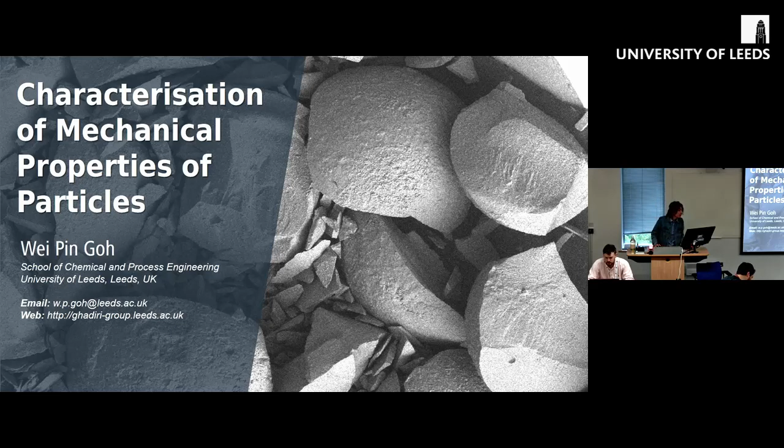Hello everyone. I'm Wei Pin, and today I'm going to talk about the characterizations of mechanical properties of particles.

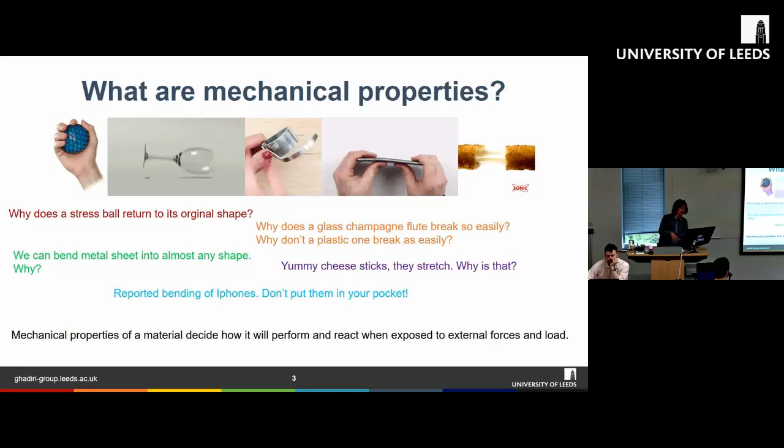So basically, all of these behaviors of materials are actually manifestations of mechanical properties. Essentially, the mechanical properties of a material will decide how materials perform and behave when they are exposed to external forces.

So the scope of my talk today: particularly, we're going to talk about the mechanical properties in the context of particle breakage.

Particle breakage can be desirable or undesirable, and particle breakage actually happens across different industries. For desirable breakage, we're talking about something like milling—we want to mill something into smaller particles. For example, with flour, you want to grind the grains small enough so that you can use it as flour.

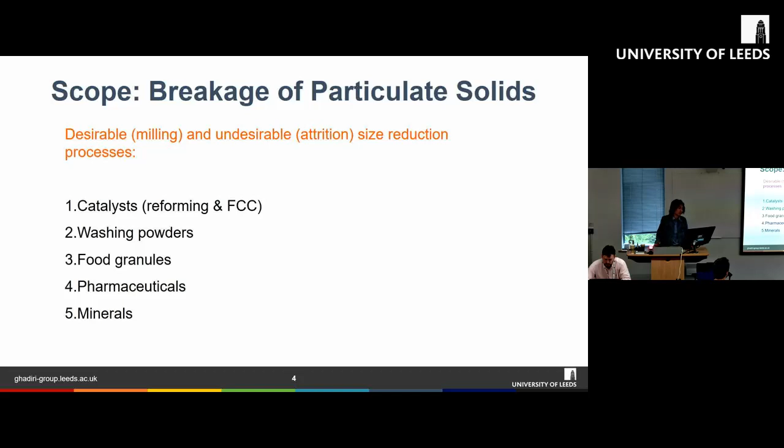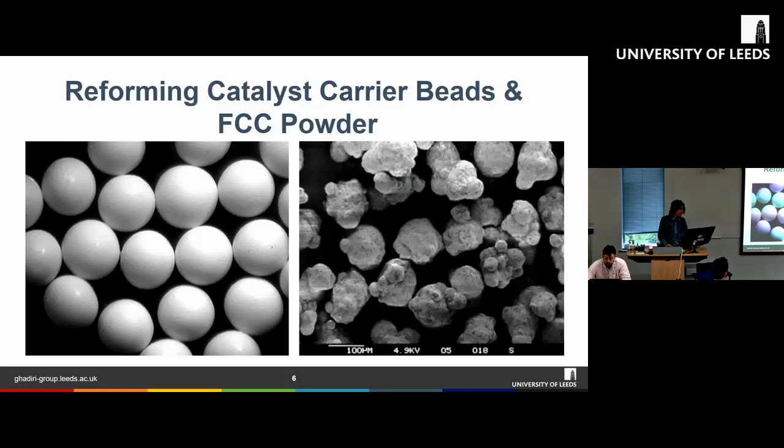But we would also come across some unwanted particle breakage. For example, I have a case here of FCC and moving bed reactors, where you have the catalyst carrier beads, and through the cycles of reactions inside this reactor, the carrier beads eventually get worn out, and it can lead to fragmentation. This is something we don't want, because it could actually cost a lot of money as a result of the breakage of the carrier beads.

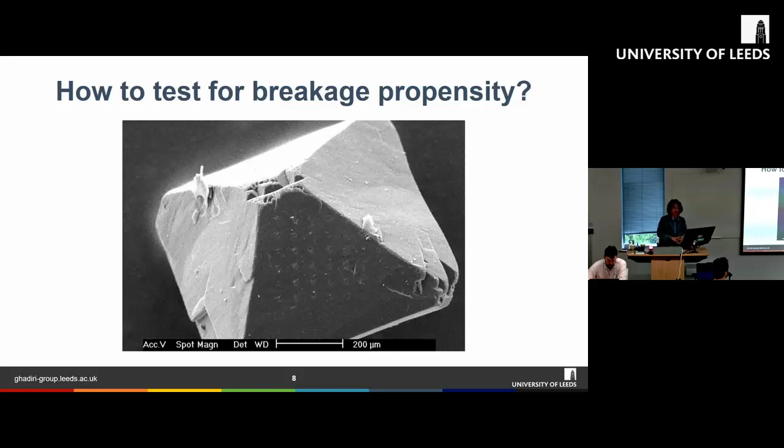So then the next question is: can we somehow do some simple characterizations, and with the characterization that we do, can we then predict the breakage propensity? Can we somehow predict how a material will behave under external influences and external forces?

So the first part of my presentation today is going to be circling around high school physics, talking about brittle materials, ductile materials, and of course we also talk about something in between, something we call semi-brittle materials, where they undergo semi-brittle failure.

Following that, I'll talk about the characterizations of some of the more common mechanical properties that we use in describing particle or material failure.

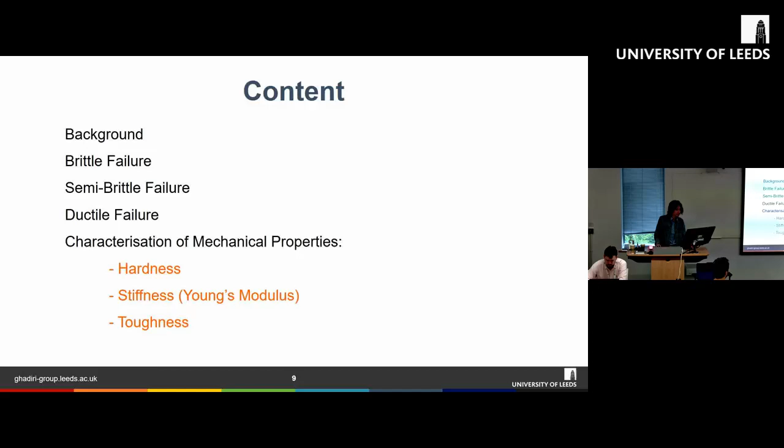So, mechanical breakage. What affects mechanical breakage? What affects how particles or objects break? If you have an object, how are we going to break it? How is it going to break?

It's actually affected by the mode of loading and the material properties. By mode of loading, we mean how you actually stress the object—be it by impact, shear, compression, or crushing. These are different types of loading you can apply to an object. Apart from how you load it, the rate at which you load it also plays an important role. If you load it at a much faster rate, the material will behave differently and break to a different extent.

So the three major types of failure modes we have, as I mentioned earlier, are brittle failure, semi-brittle failure, and ductile failure.

With brittle failure, it is caused by the rupture of bonds between molecules. For semi-brittle failure, it starts off with dislocation mobility—basically the molecules, atoms, or particles get dislocated. But when the stress or force applied is high enough, the bond starts to rupture, and that's how they fail. For ductile materials, failure is mainly caused by dislocation mobility. Ductile material, as you know, is very malleable—you can apply a large amount of force and it just keeps deforming and deforming. So this is caused mainly by dislocation mobility.

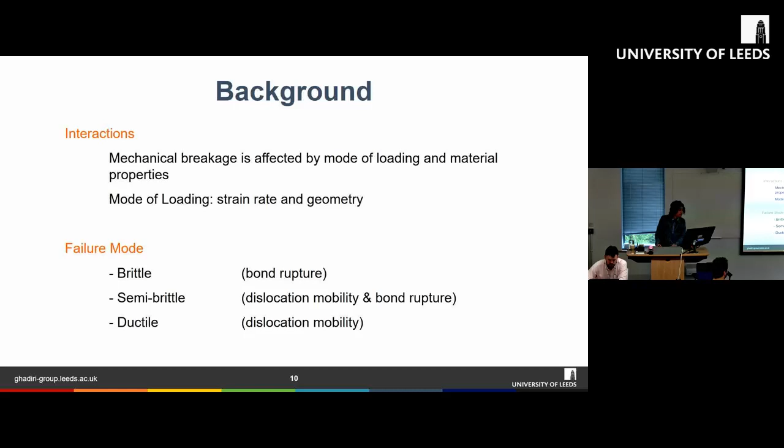All right, so brittle failure mode. Some examples of materials which undergo brittle failure—classic examples would be glass, like the example I showed earlier. If you drop a glass, it shatters almost instantaneously. This is actually caused by internal flaws of materials, surface flaws of materials, and associated deformations.

A typical characteristic of brittle failure is that you don't see plastic deformation. Basically, what I'm trying to say is that you don't observe the material getting deformed before it actually fractures. But they do undergo some sort of plastic deformation—it's just so small that you can't actually see it.

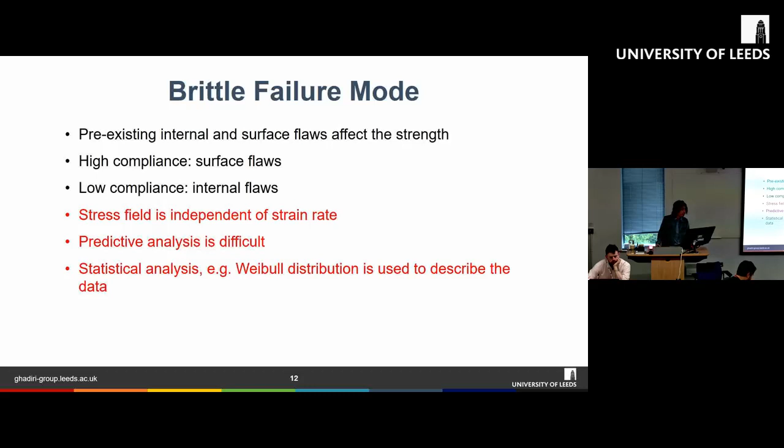Again, this is an example I showed earlier, the catalyst beads used in the FCC reactor—it's a typical example of material which undergoes brittle failure. You can see that they basically break into big fragments.

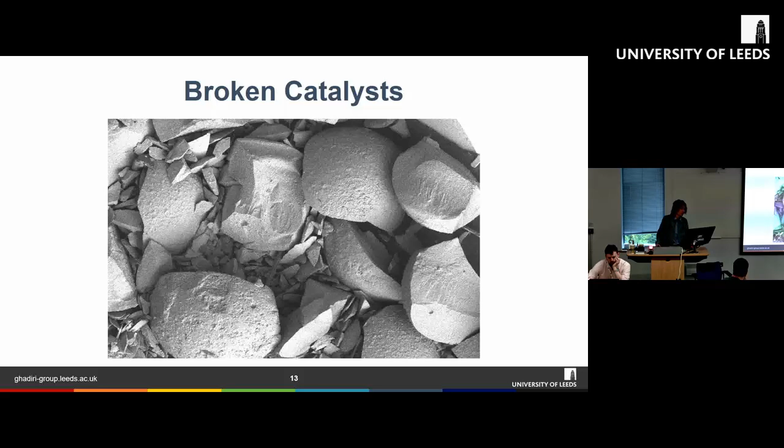Here's another example of porous alumina beads. At this corner, you can see this very classical conchoidal fracture, with very smooth curving features, which is again a typical characteristic of brittle material.

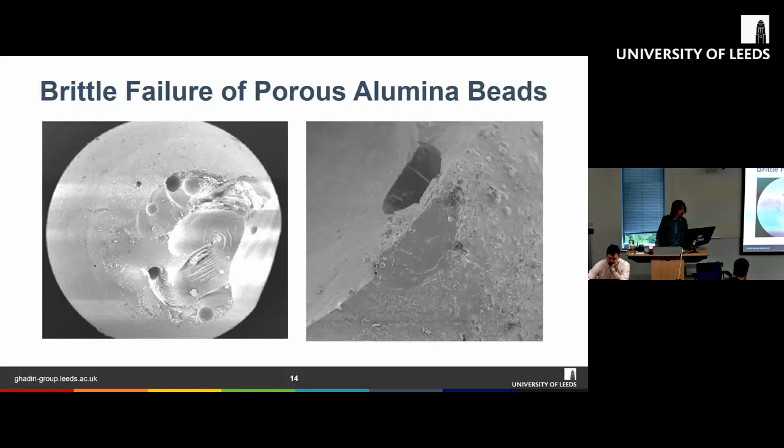Now let's move on to semi-brittle failure. The most obvious characteristic that differs from brittle material is that you can actually observe plastic deformation of the material before it fails. So the crack propagation is actually preceded by plastic flow, meaning you experience some plastic flow before a crack is initiated.

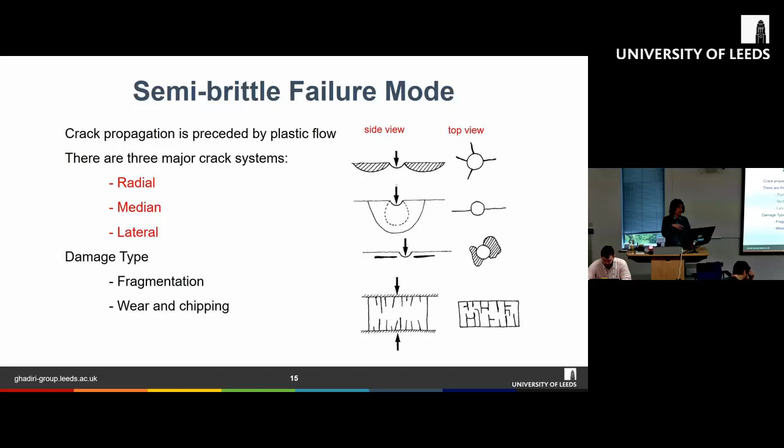The third type is the lateral crack. This type of crack runs parallel to the free surface of the material, causing it to chip off and come away from the surface. From the top, it looks something like a thin layer of material coming off the surface. So radial and median cracks are responsible for fragmentation because the cracks go deep into the sample and cause the material to fragment, whereas lateral cracks are responsible for chipping and wear of the material.

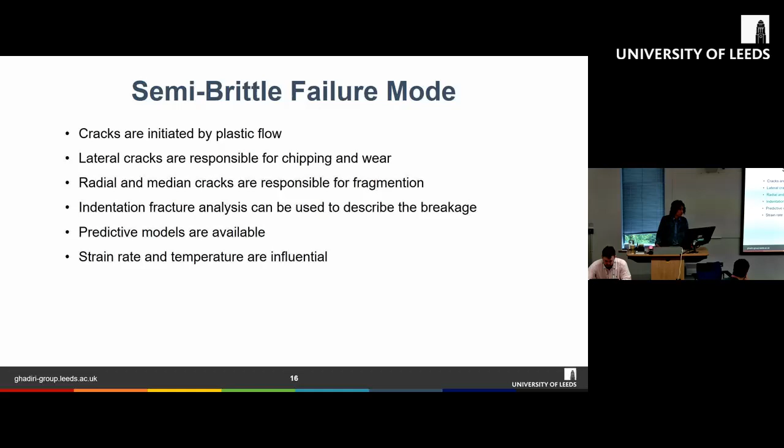Quick summary for semi-brittle failure mode: cracks are initiated by plastic flow, lateral cracks are responsible for chipping and wear, and radial and median cracks are responsible for fragmentation. Indentation fracture analysis can be used to describe the breakage, and there are many predictive models available in the literature to describe this type of failure. For semi-brittle failure, strain rate and temperature are influential.

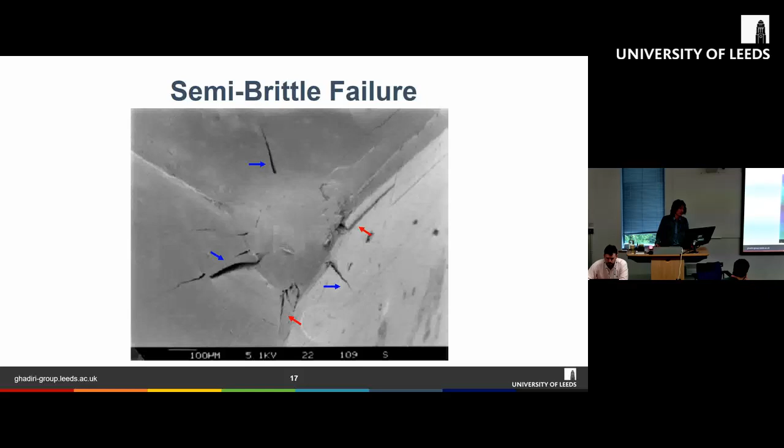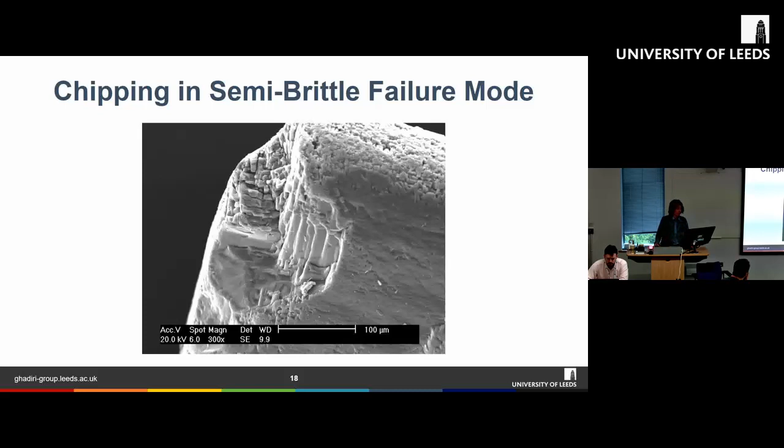These are examples of material which undergo semi-brittle failure. At the impact site you can see very obviously that the material gets flattened, showing some plastic deformation. But we also see different crack systems here—for example, some median or radial crack, and also some subsurface lateral crack. Here's another example showing the chipping of the corner of a particle.

The important factors which affect ductile failure are the attack angle, the ratios of the Young's modulus and hardness, the ratios of hardness values of the two surfaces, and also the ratios of the shear stress and the shear yield stress.

Okay, so now just a quick overview of the three types of failure modes. Then we'll move on to some of the material properties that account for these failures.

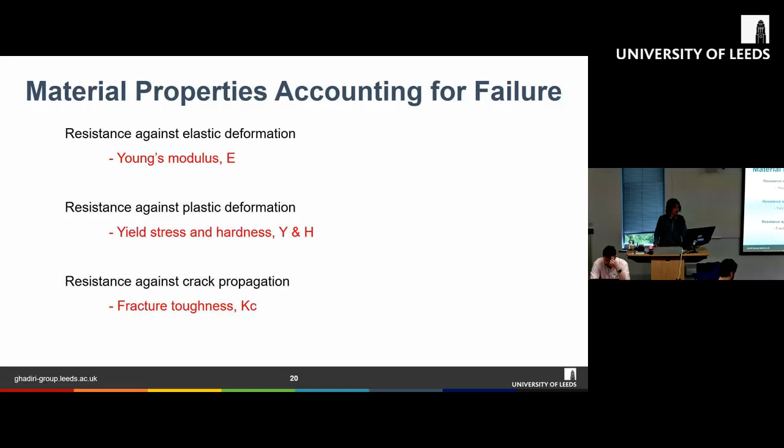So how do we measure hardness, and what is hardness? Hardness, like I mentioned before, is the resistive pressure when a permanent impression is made, typically after 8% strain. Indentation hardness is probably one of the most common methods used to measure the resistance to plastic deformation. Some of the most common indenters are Vickers, Brinell, Rockwell, and Knoop indenters. Hardness measurement is actually related to yield stress, work hardening, anisotropy, and geometry.

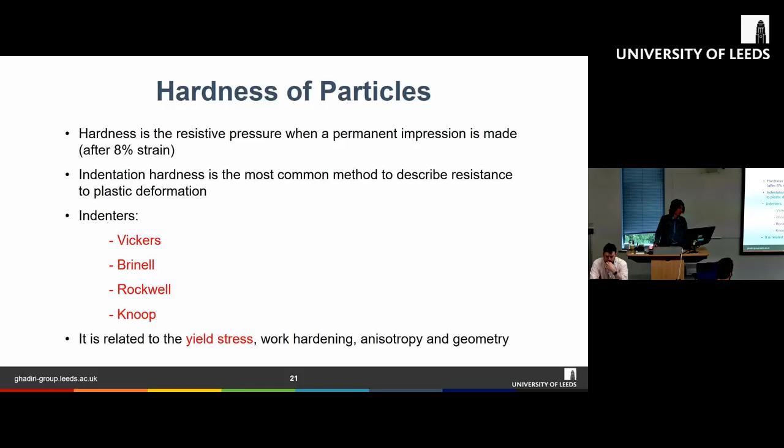So when an indentation is made, plastic deformation is actually confined, and therefore hardness is much larger than yield stress itself. The relationship between yield stress and hardness can be governed by a simple equation: hardness is simply the function of yield stress times the constraint factor. This constraint factor is affected by material properties, indenter geometry, and friction. Some of the relevant properties are elastic modulus, work hardening, and anisotropy.

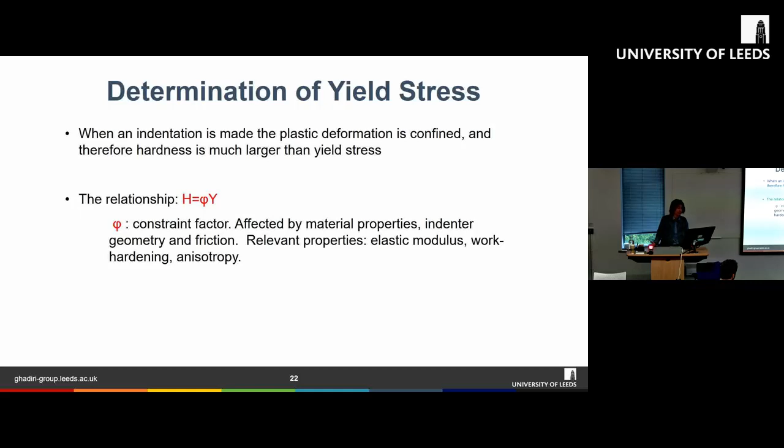So these are the constraint factors of some common materials. For glasses and polymers, we're talking about constraint factors of less than 3. For a wide range of metals, it's more or less around 3. And for ionic single crystals, we're talking about constraint factors higher than 3.

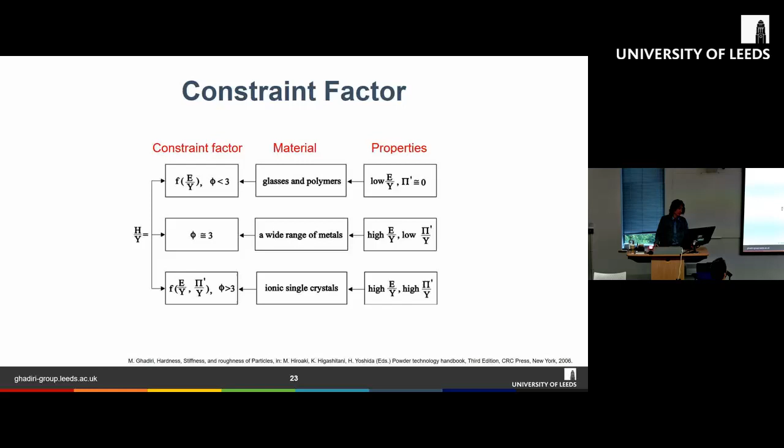So I mentioned that to measure hardness, it's normally done by indentation. But the previous indenters I was talking about are mainly for bigger samples. In powder characterization, we're interested in looking at the mechanical properties of single particles, sometimes around 100 microns or in some cases even less. With the types of indenters shown earlier, it can prove quite difficult to prepare the sample and to indent it, because the indenters are bigger compared to the particle size.

So since the late 80s, we have this new development by Pollock: a new indentation method that we call nanoindentation. Essentially, what's different compared to the previous indentation tests is that we can use much smaller particles, and for this type of setup we also have higher resolution, meaning we can do a smaller indentation but still get enough resolution to look at how the force and the change in depth of the indenter occur during the penetration. So here is an example of the setup of a nanoindenter.

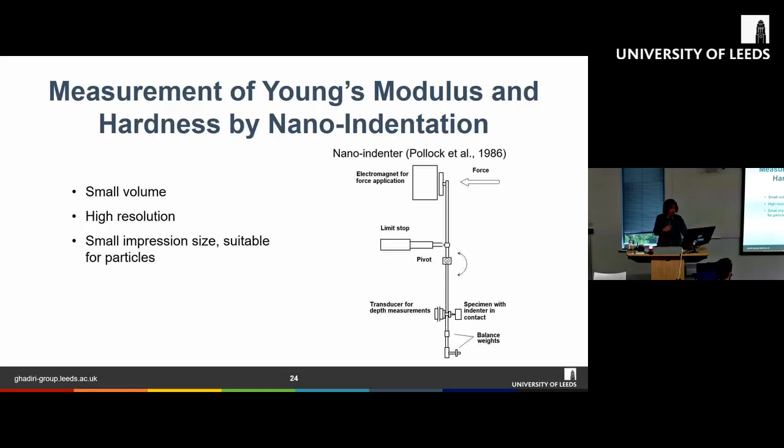How we apply force is by electromagnet. You apply current through the electromagnet, and this coil gets pulled towards the electromagnet. In the middle, we have a pivot, and as a result of this pulling force, the indenter gets pushed towards the surface of the specimen. To measure the depth, we have a transducer, and the change in distance between the plates results in a change of capacitance. By measuring the capacitance, we can correlate how much depth the indenter has penetrated through the surface of the material.

So this is an example of an impression made by a Berkovich indenter. The Berkovich indenter has a typical pyramidal shape, and because of this three-sided geometry, it's very easy to machine to a very high precision and very sharp angle. Hence why it is highly preferred in the work of nanoindentation.

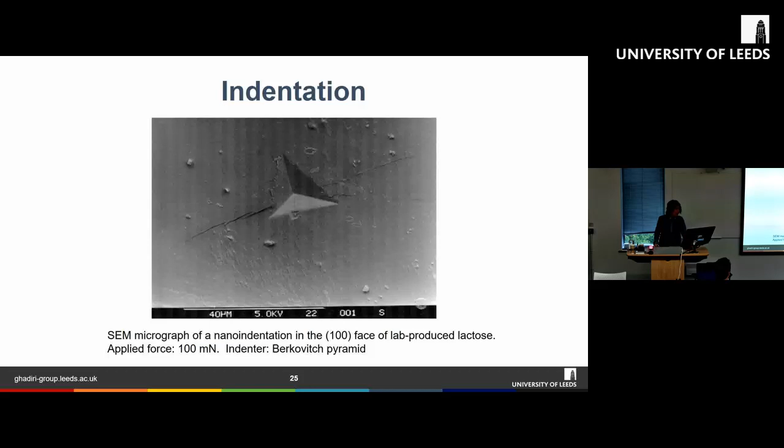So here's a plot showing a typical depth-load profile when an indentation is made. Essentially what we're seeing is the resistance of a material to penetration load as a function of depth. We use this to infer an effective hardness.

When the indenter first comes into contact with the surface of the material, the load starts increasing up to a specified maximum point, and then it starts unloading. But it won't unload back to the original line, so there's some hysteresis here, and that's due to plastic deformation.

The maximum point here is where we measure the hardness of a material—essentially the maximum load experienced—and then you can use this correlation. We can easily use it to characterize or measure the hardness of the material, simply by dividing the maximum force by the indentation area, which is given by this correlation, where K is the indenter shape factor and HC max is the maximum penetration depth.

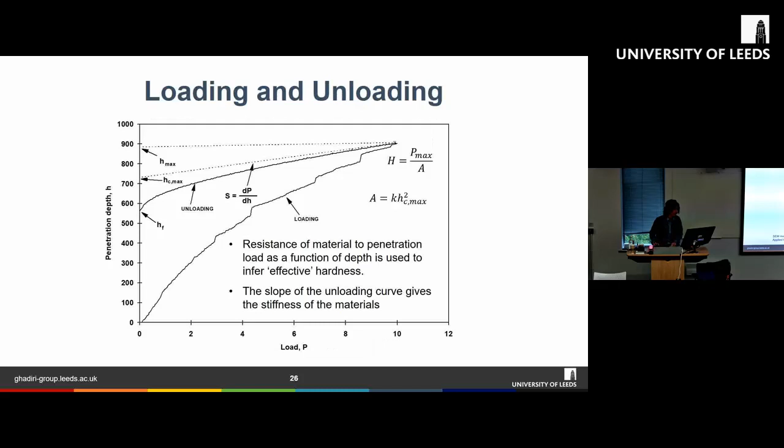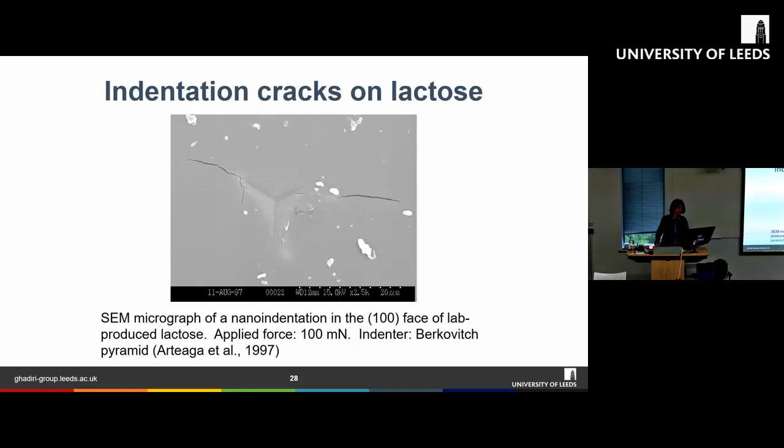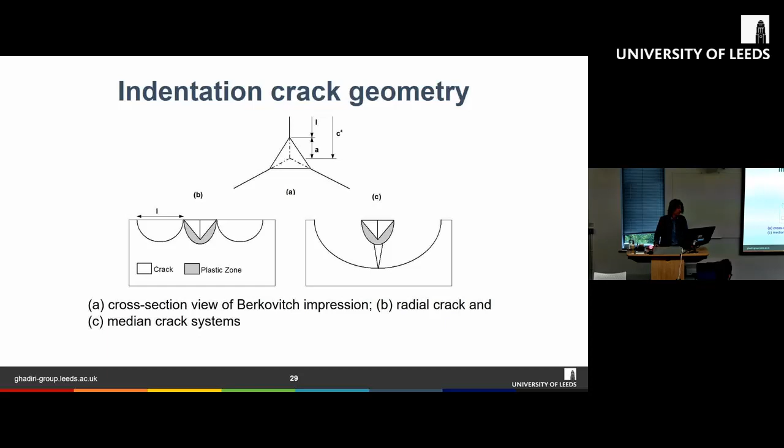If you plot the crack length versus the load—this is work done by Arteaga et al. in 1997—on a logarithmic scale, we get a very nice linear relationship, and the slope of this line gives us a measure of the fracture toughness of the material.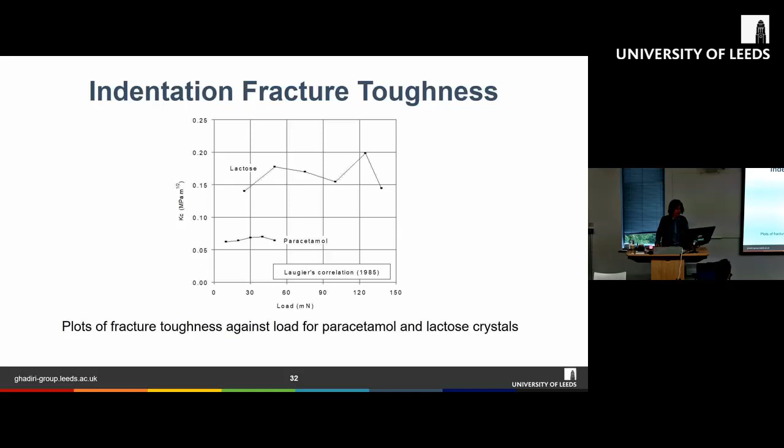Concluding remarks for the first part of my presentation: the relationship between hardness and yield stress requires consideration of material properties, indenter geometry, friction, etc. Hardness and elastic modulus can both be determined from a single penetration test. Indentation fracture mechanics shows that the important factors affecting material failure are hardness, Young's modulus, and fracture toughness. For particulate solids, a suitable technique for characterizing hardness, Young's modulus, and fracture toughness is nano-indentation. Development of an understanding of tableting, comminution, and compaction processes requires characterization of these properties.

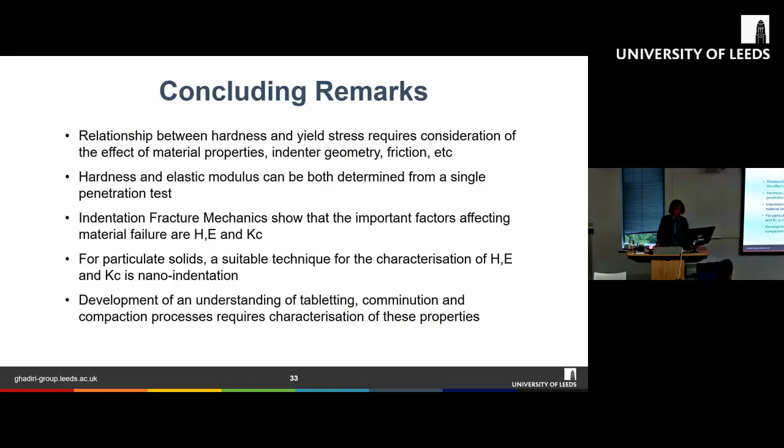The next part of my presentation is going to look at the characterization of bulk deformation and breakage of particles—breakage characterization.

Okay, so I'm going to talk about the analysis of breakage mode, mainly focused on semi-brittle mode, and then I will also briefly describe the analysis of breakage for brittle mode, and also look at the bulk behavior of a particular system.

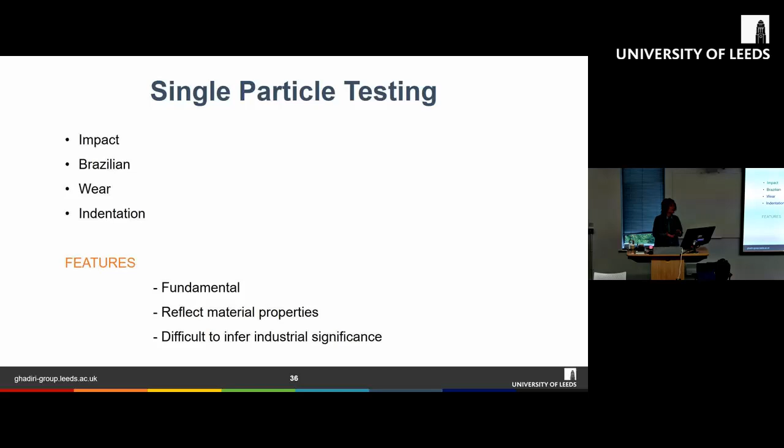So to characterize particle breakage, we can do single particle testing as well as bulk testing. Here are some examples of single particle testing: impact test, Brazilian test, wear indentation test. The features of single particle testing are that they are fundamental and reflect the material properties of single particles. But the problem is that it's very difficult to relate to industrial application, and therefore in industry most people prefer using a bulk test.

For example, looking at compressions of a bed of particles. Here are some examples of different bulk tests: shear, fluid bed, ball milling, tumbling, and vibration. The feature of these bulk tests is that they do reflect particle interaction, because the particles get to interact against each other, and they are closer to industrial cases. But the problem with bulk tests is that they're sometimes quite difficult to interpret, and they're useful for relative comparison, but if you're not careful, you can give very misleading interpretations of the data.

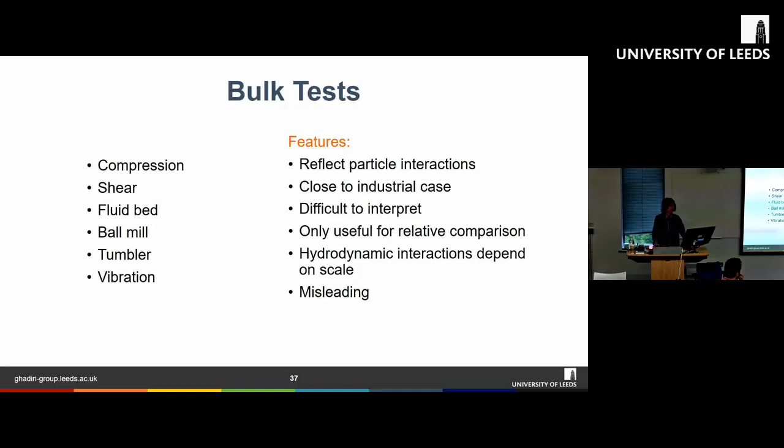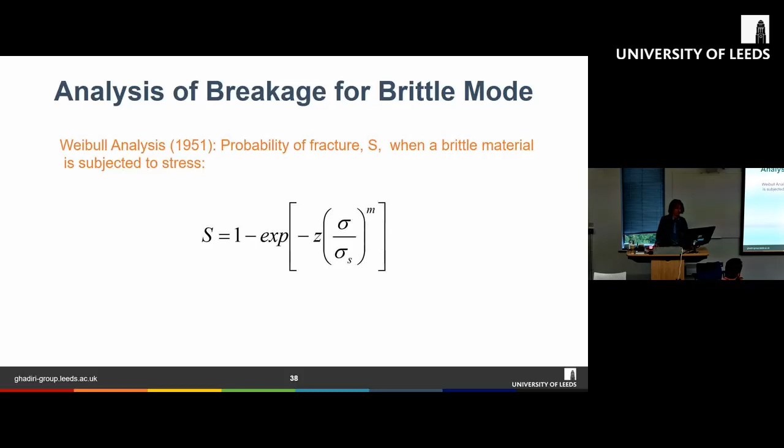So for brittle failure, I'm going to talk about the analysis of brittle materials. The breakage of brittle materials is actually very difficult to predict, and most people use Weibull analysis to describe it. Here is an example of Weibull analysis, which gives the probability of fracture S as a function of the stress you apply to the material and also the crushing strength of the material. We have M and Z as the fitting constants of this model.

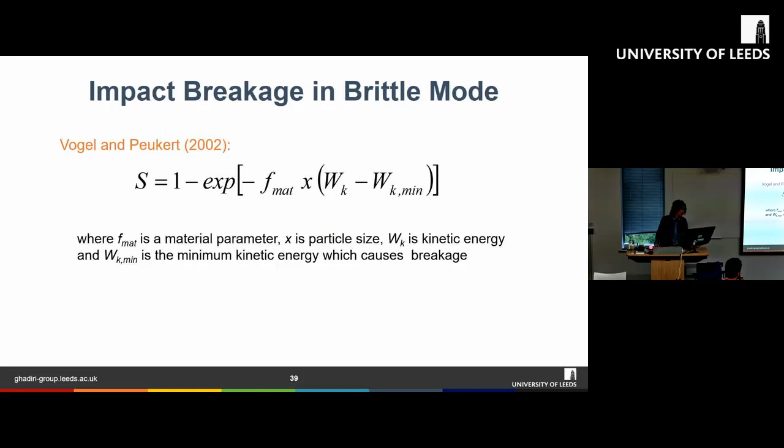We also have a model by Vogel and Peukert, which is based on Weibull analysis, but instead of the previous formulation, they try to incorporate the properties of the material by introducing fmat, x, Wk, and Wk,min, which refer to the material parameter, particle size, the kinetic energy, and also the minimum kinetic energy which causes particles to break.

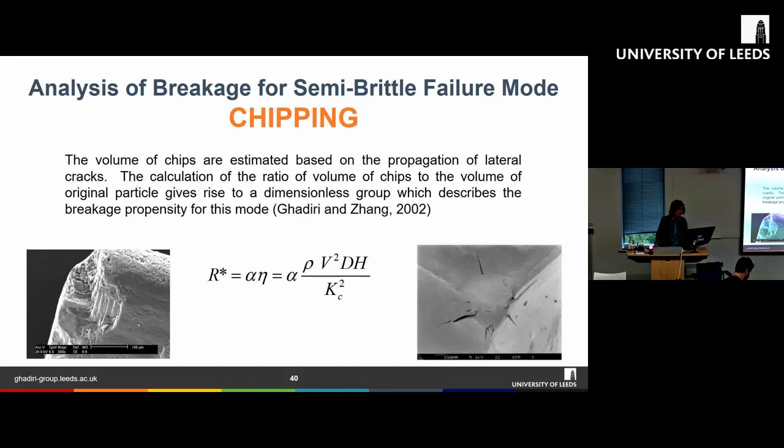This is governed by this equation here, where R star is the fractional mass loss, and it is a function of the density of the material, V, the impact velocity, D, the particle size, H, the hardness, and Kc, the fracture toughness. α here is a proportionality constant for us to fit the data.

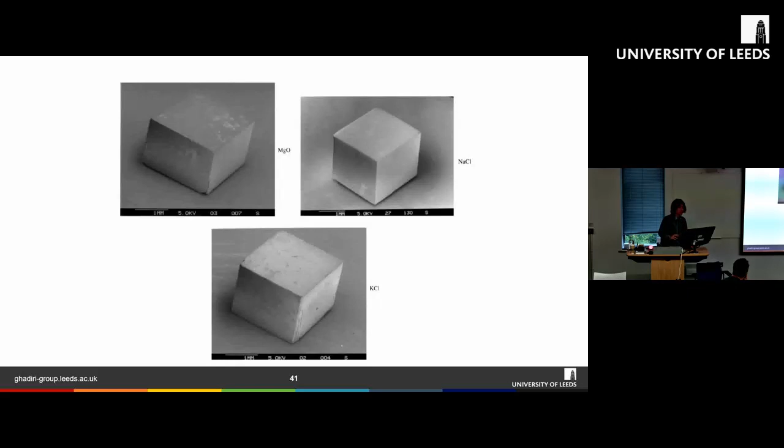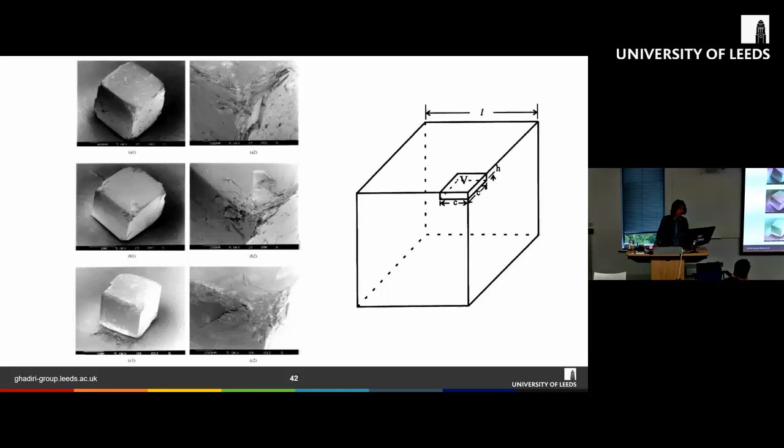So here, just to show you some examples: we have magnesium oxide, sodium chloride, and potassium chloride, nicely lab-grown big cube crystals of these materials, and how they undergo chipping as a result of impact. You can see the corners chip off, and this comes back to the failure mode of semi-brittle failure. So we have this sublateral crack, where a layer of material gets broken off from the material itself, and you can easily calculate the volume of this chip and fit it into the equation.

This type of analysis is done on a gravimetric basis. What I mean is that we do this by sieving, something that Professor Tatsumi Matsuyama mentioned in yesterday's talk. So we do sieving, and these sizes here are the standard sieve cuts that we use. We separate the particles into different sieve cuts, subject them to different impact velocities, and look at the extent of breakage. This is what we get.

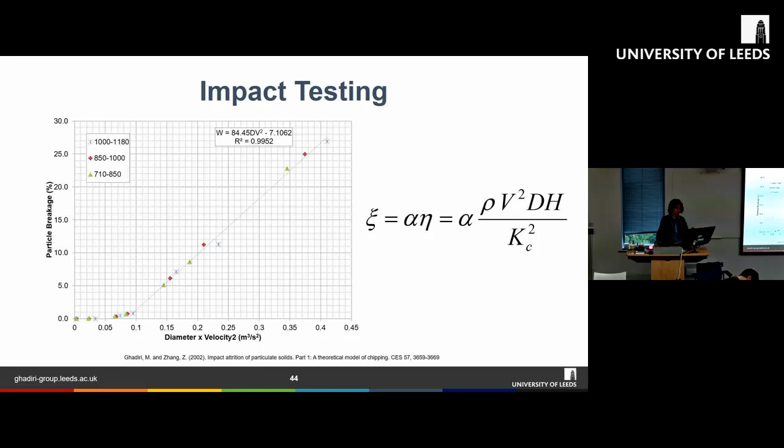Right, so that's for chipping, and now we move on to fragmentation. To describe fragmentation, we can look at Ghadiri and Zhang's model for the force required for particles to fragment. Here are some snapshots from a high-speed camera showing particles undergoing fragmentation. You can see it breaks into half as a result of impact.

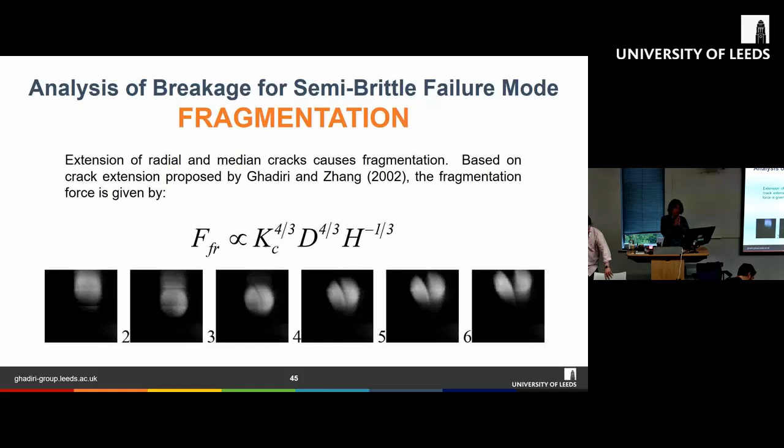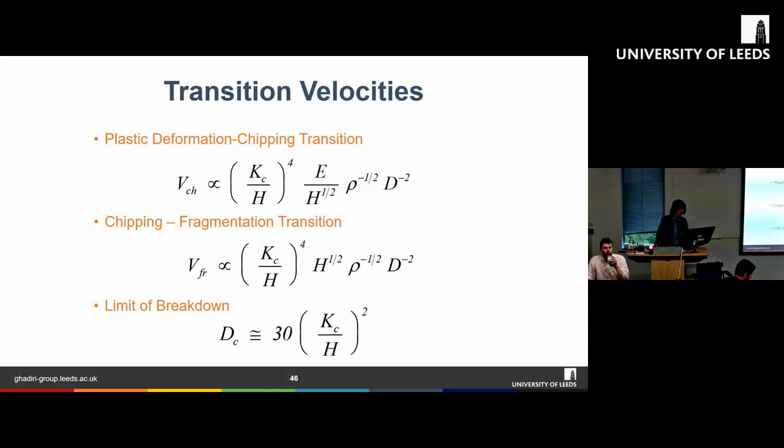And here are some transition velocities. These different velocities describe the transition point from plastic deformation to chipping, and then from chipping to fragmentation, and also here we have a limit of breakdown. I will go through them in detail here.

Right, so we talk about characterizing particle impact breakage, and the tool that we use is what we call the single particle impact tester, as you can see in the picture on the left here, which is a device we have in LIT, an in-house built device. Here is a schematic.

Basically how it works is that you apply a vacuum pump from the bottom, and we feed particles from the top, and as a result of the vacuum created inside this chamber, the particle gets sucked down, accelerated, and impacts on the target, which is a very rigid target made of sapphire glass. As a result of that impact, the particle breaks.

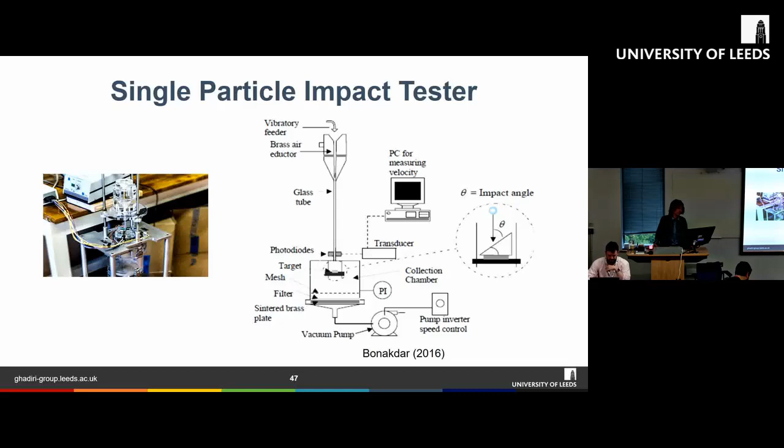Towards the end of the experiments, we collect the particles at the bottom of this porous media. We then characterize basically the extent of breakage as a result of the impact. Here, of course, we can also look at different impact angles by putting an additional target here with an incline angle. But the question is that with this type of equipment, it is not commercially available.

But for very friable materials, we actually found that as a result of this impact, particles actually undergo breakage. This is actually not wanted, because when you want to measure particle size, you don't want the particles to break, because if they break as a result of this dispersion, what you get towards the end is not representative of the actual particle size.

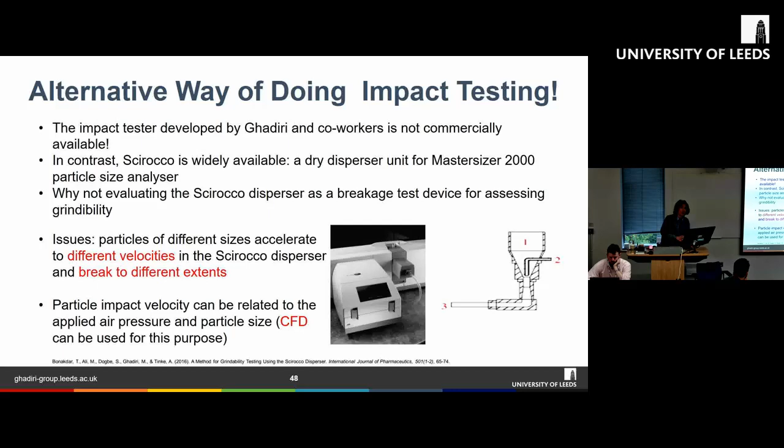But of course, to use Ghadiri-Zhang's model, we need to have an idea of the impact velocities of these particles when they are inside the system. So unfortunately, like with the setup of Malvern Mastersizer 2000, we can't actually measure the impact velocity using a high-speed camera or any sort.

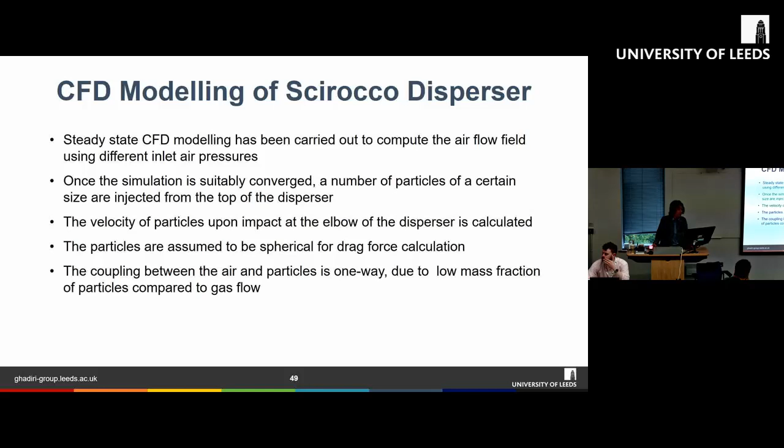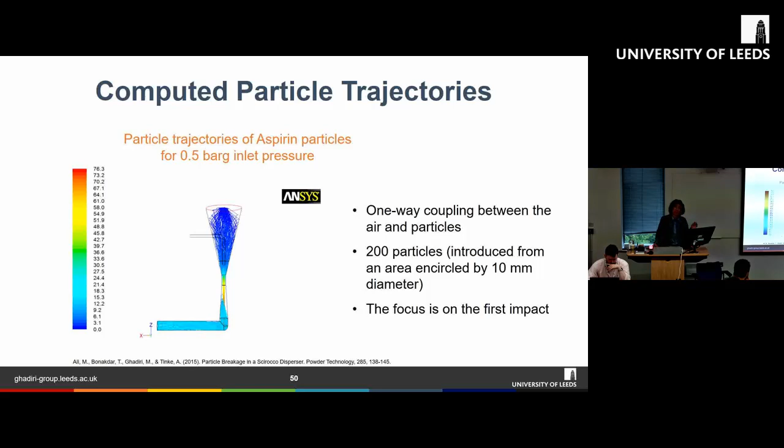So the way we can characterize or predict the impact velocity is by CFD modeling. This work was actually done by our previous colleague, Dr. Muzammil Ali, who performed CFD simulations of this Scirocco disperser, looking at particles of different density and size, and what sort of impact velocity they experience under different dispersion pressure. We can then correlate this by applying Ghadiri-Zhang's model, but slightly modified.

Having done this, we can nicely apply Ghadiri-Zhang's model even if you don't have a single particle impact tester. This is work that was done many years ago. But some of you may say Malvern Mastersizer 2000 is old, probably 20 years old now, and in fact Malvern Panalytical have stopped supporting it.

So to solve this problem, we also extend our analysis to Malvern Mastersizer 3000. We perform a similar type of analysis using CFD to predict the impact velocities of particles inside this disperser, called the Aero S. By similarly applying Ghadiri-Zhang's model, we can also use this method to predict the strength or breakability of materials.

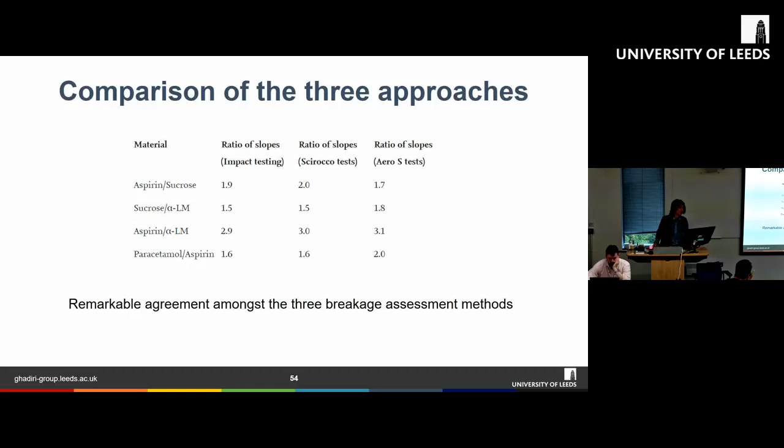Comparing the 3 different approaches using single particle impact tester, Scirocco test, and Aero S, you can see they give remarkably close results, even though they are fundamentally different methods between impact testing and Scirocco test. If you look at the breakability index of aspirin to sucrose, the result from the single particle impact test is 1.9, and for Mastersizer 2000 and 3000 we get remarkably good results across these 3 different methods.

But then you may ask, okay, so we have laser diffraction. It's known that if you have highly acicular crystals, laser diffraction won't give you a very good measurement of the particle size. So how do we then characterize acicular crystals? They break very differently compared to a more equiaxed crystal, and especially in the pharmaceutical industry most APIs, for some reason, tend to have an elongated shape. So how can we characterize the breakage of this type of material?

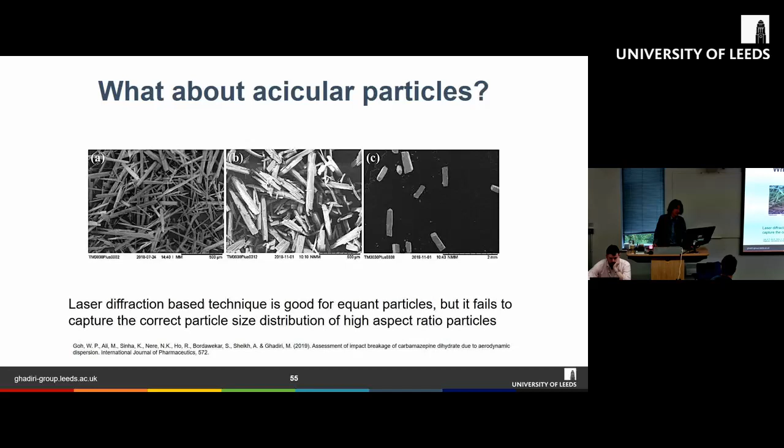So we use a different approach instead. Instead of using laser diffraction, we move on to using light microscopy technique, in which we actually see the particles and look at how the particle breaks. For laser diffraction, we are using the scattering of light, so we don't really see how the particle breaks. But with light microscopy technique, we can do that - we can actually assess how a needle-shaped particle breaks.

A commercial device available for this type of analysis is the Malvern Morphologi G3, as you can see here. How it works is that we put some materials in this well here, and apply a pulse of air from the top. As a result, particles collide against the wall of this dispersion spool, and then they break.

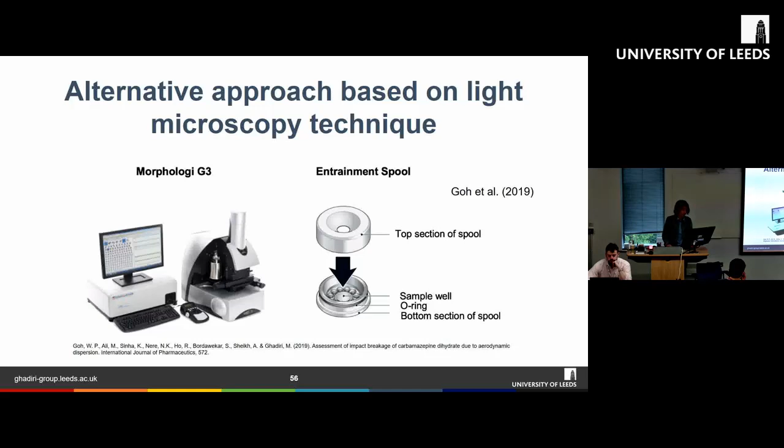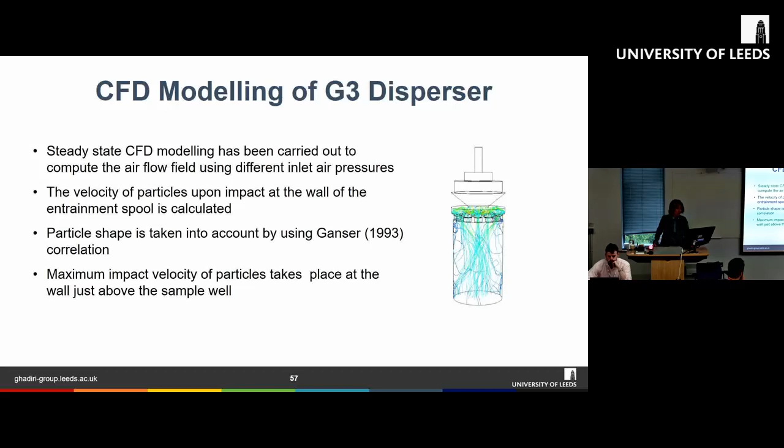We can't really measure the impact velocities of the particles inside this dispersion spool. Hence, with the help of my colleague Dr. Muzammil Ali, we performed some CFD simulations to look at the impact velocities of particles inside this dispersion spool, and here is a video to show you how the particle breaks inside the dispersion spool.

We put the material in the sample well, and as a result of a pulse of air, particles get entrained and collide against the surface of this dispersion spool. They break and then exit through this hole, and settle down on a piece of glass slide for particle size analysis.

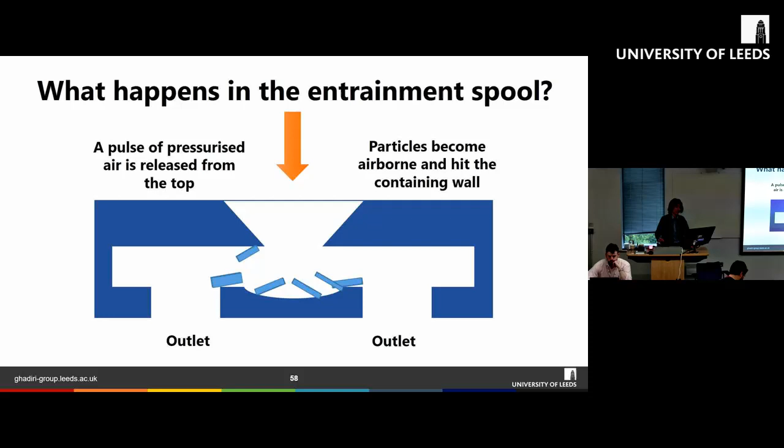Here's an example showing evidence that needle-shaped particles do actually undergo particle breakage as a result of dispersion inside the Malvern Morphology G3. This work was done by Saifoori here, who's sitting quietly there and has done a nice job, managing to publish a paper during her MSc project.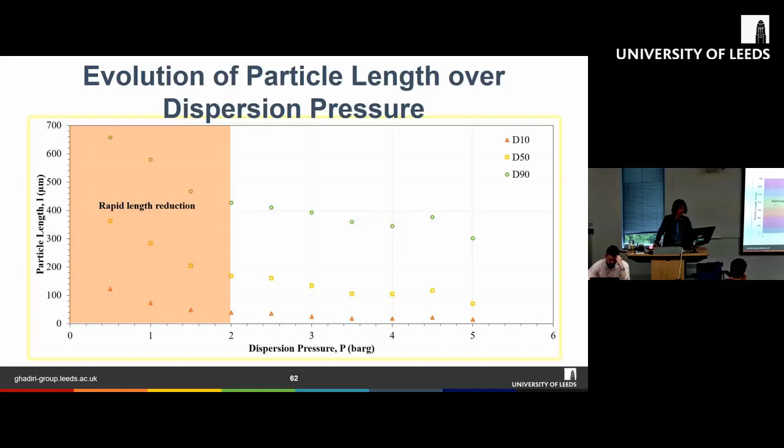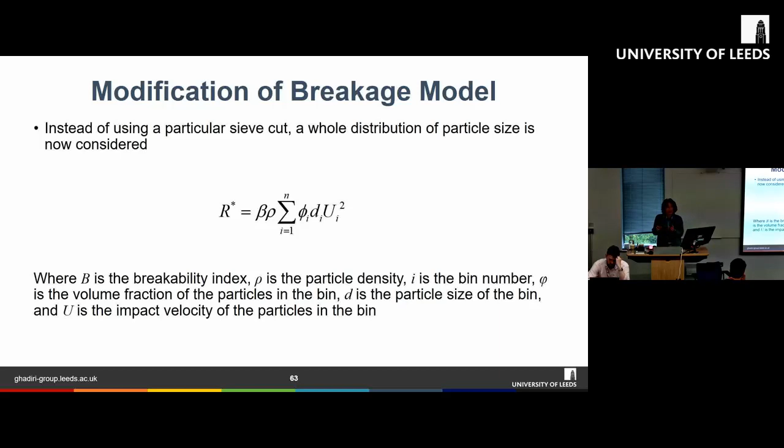Using Ghadiri and Zhang's model, we can apply this method to describe the breakage of acicular crystals. We made some tiny changes to the model by incorporating, instead of using a single narrow size class of crystal, the full distribution of particles, and then do the impact test. As a result, we need to give weightage to different particle sizes and then fit them into this model.

Having done that, we come to this very nice correlation here. You can see we have beta L-glutamic acid, and they're nicely lined up, basically this linear correlation, compared to benzothiazin. The slope of this line represents how breakable a material is. Benzothiazin actually has a lower breakability index compared to the beta L-glutamic acids.

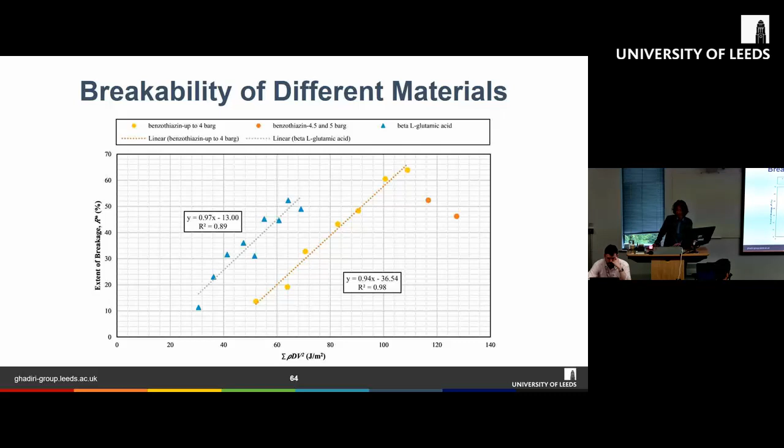So here's a comparison of all the techniques that I've discussed today. We have the single particle tester, where the size analysis technique is by gravimetric. For Scirocco and Aero S, they are by laser diffraction. Morphologi G3 is by light microscopy.

The amount of sample needed for them varies. For a single particle tester, typically we require a few grams of sample, and the same can be said for Scirocco Aero S. But for Morphologi G3, we actually need less — we can use milligrams of sample, and still perform breakage analysis of the material.

Impact velocity we can measure, but for the other three methods we actually estimate it using CFD. For velocity range, the single particle tester can go up to a very high impact velocity. The same goes for Scirocco, but for Aero S it's slightly lower. For Morphologi G3, because of the gap limitations of the dispersion spool, we can't accelerate particles to a very high impact velocity.

So for suitability with acicular crystals, only Morphologi G3 is suitable. Single particle tester, Scirocco, and Aero S are not so good at analyzing acicular crystal breakage.

The time needed for analysis with Scirocco and Aero S is very quick - you can do them within an hour and get all the data you need. But for the single particle tester and also Morphologi G3, you require a longer time period.

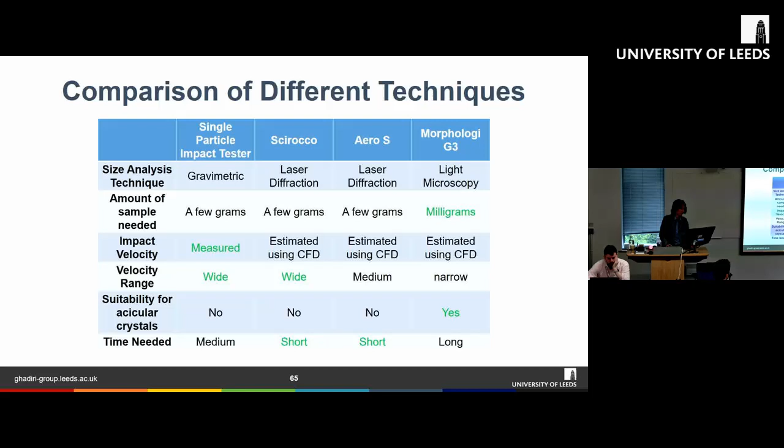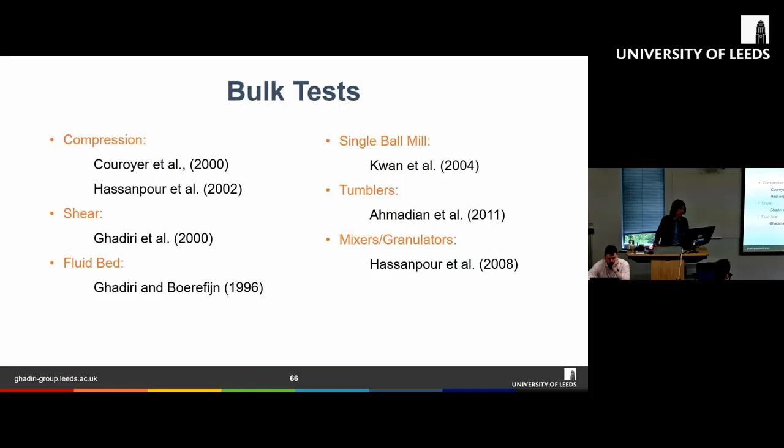Okay, so next I want to move on to bulk tests. Here are some examples of different bulk tests available, and how we can characterize the breakage of particles. The very first one is an example of bulk compression.

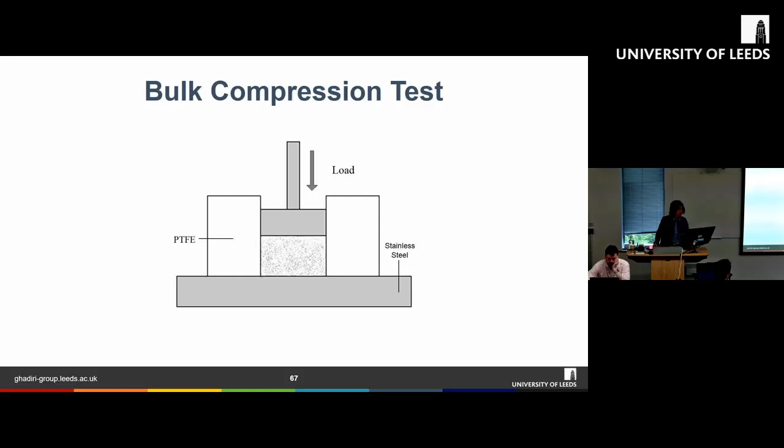We can apply a normal force, putting a sample in the piston, and break the particle as a result of increasing the load. We can do that using a commercial device, say an Instron mechanical tester. Here's an example showing how the particle breaks as a result of different pressures applied.

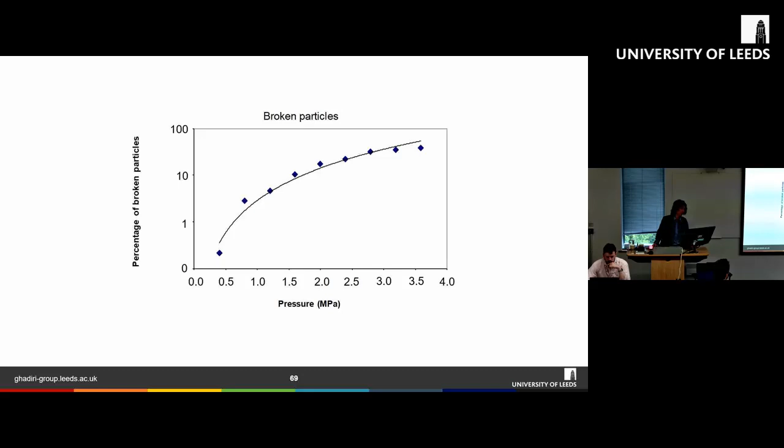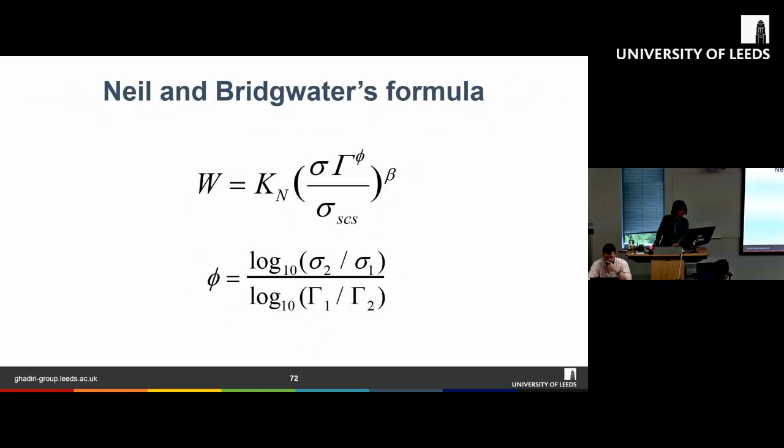If you apply this equation here, you can essentially unify this data into a straight line like this, which gives us a measure of the breakage - how the particle breaks. In other words, it gives us some predictive capability on how the particle will break under shear deformation.

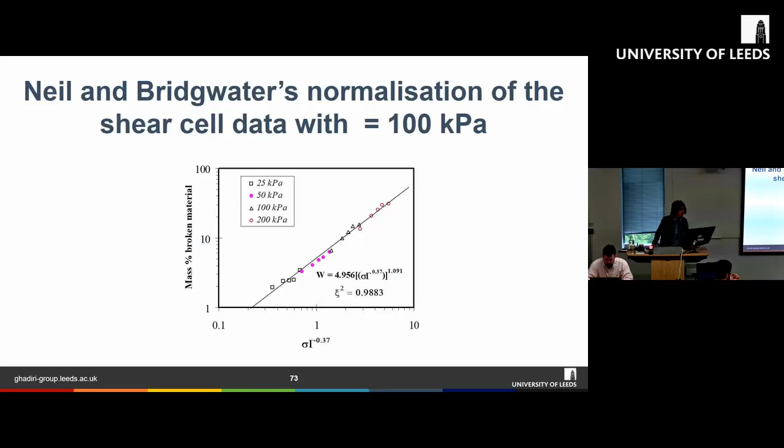Here's another device to show how we can look at the attrition of materials under the coupled effect of impact and shearing. This is a device we developed many years ago, which we call the PSI tester - basically a short form for Particle Shear and Impact Tester.

This device was developed as a result of collaboration between University of Leeds, the Enzyme Dust Consortium, and also Hosokawa Micron. They built this device in which particles get impacted on this impact bend, then recirculate down into this roller box here, where the particle gets sheared. So particles experience impact and shear at the same time. Using this device, we can assess the performance of enzymes.

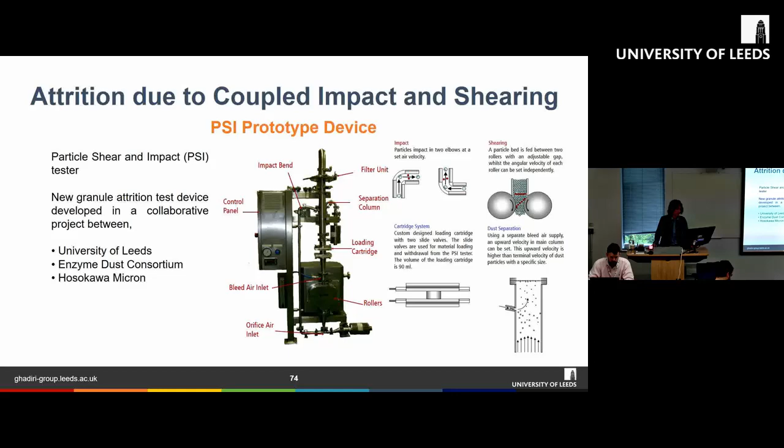So, concluding remarks for the talk. Micromechanisms of particle breakage depend on the failure mode. For damage analysis under quasi-static deformation, nano-indentation can be used to obtain the hardness, Young's modulus, and fracture toughness of the material.

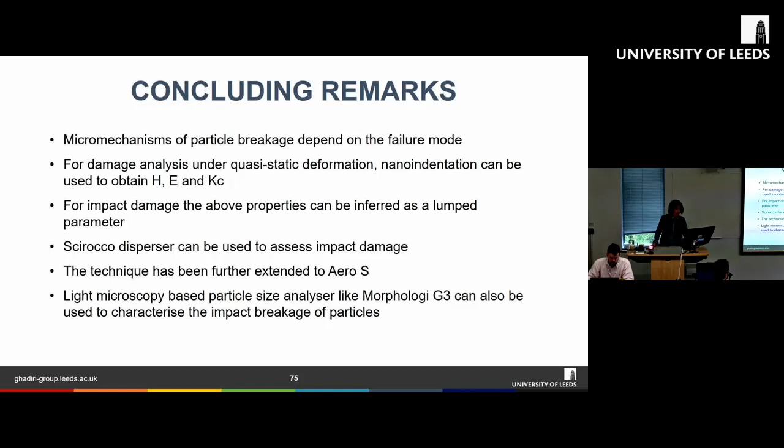For impact damage, the above properties can be inferred as lumped parameters, as I mentioned earlier in the Ghadiri and Zhang's model, and we can also use commercially available devices such as Scirocco and Aero S to assess impact damage. We can also use light microscopy-based particle size analyzers like G3 to characterize impact crystals.

The new technique is capable of characterizing the breakage behavior of acicular crystals, and analysis of bulk breakage requires a model of the mechanics of the particle assembly. There may also be coupled impact and shearing effects which should be borne in mind.

So if you have a process which undergoes different types of stressing, like most do, be careful, because what you get might be very different from what you expected.